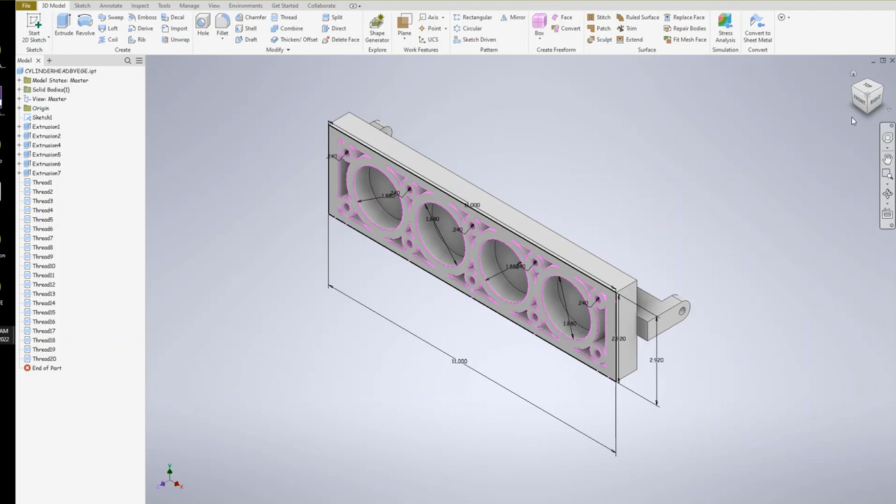Ege, and we're going to continue with the cylinder head project of the V8 motor engine. We are halfway done on the cylinder head, and we're going to simply focus our attention on the input and output valve holes. The valve holes have to be created. There is supposed to be, for each cylinder, one input and one output valve.

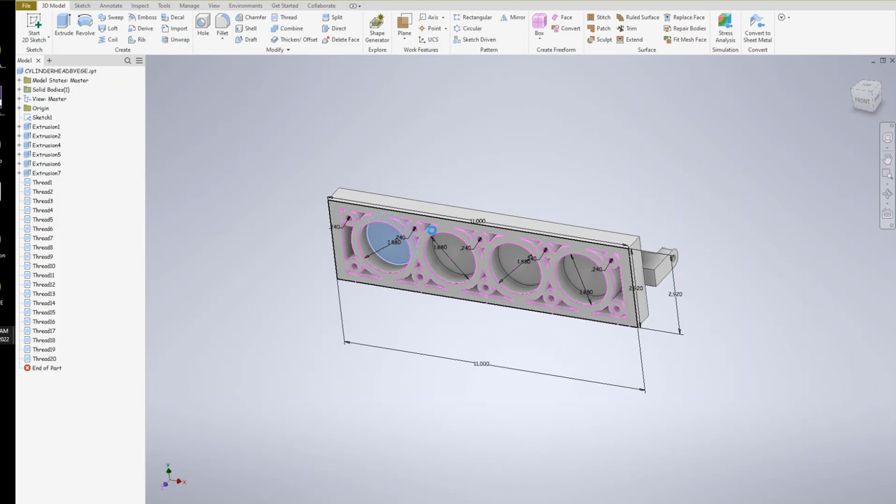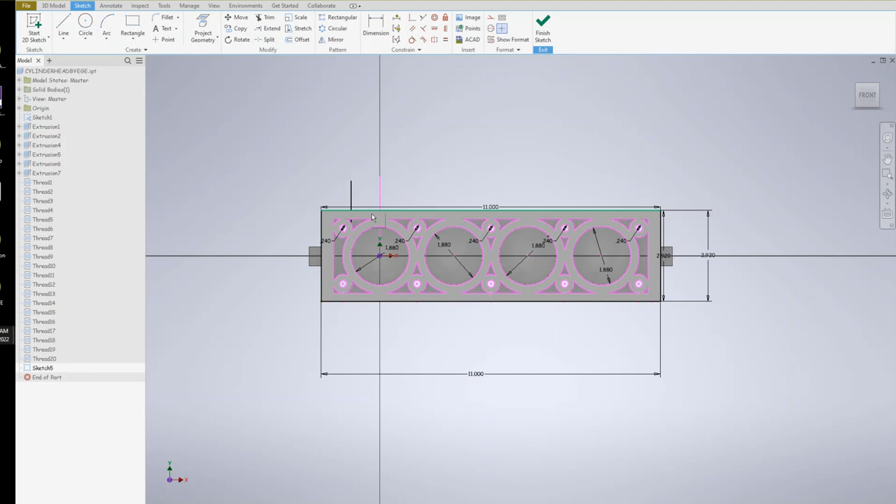For that to happen, we need to select the surface of the cylinder and click and create a sketch. From the dimensions I have, we need to create some construction lines first. I'm going to create one construction line here, enter, and another one right at the quadrant of the circle right here, and these two construction lines are going to help me locate the center of one of the valves.

So I will draw a line from the end of one construction line to the quadrant. Now I want to locate this cylinder right at the center of it. Let me dimension this also from here to 0.94. We're going to draw a line from one end, half of this distance. So half of it is 0.47.

If you don't want to compute from the top of your head, you can write the calculation here. I'm going to backspace this to demonstrate: 0.94 divided by 2, and that will give you the same distance. So that locates the center of the cylinder valve very easily and accurately. So now you start a circle from the midpoint.

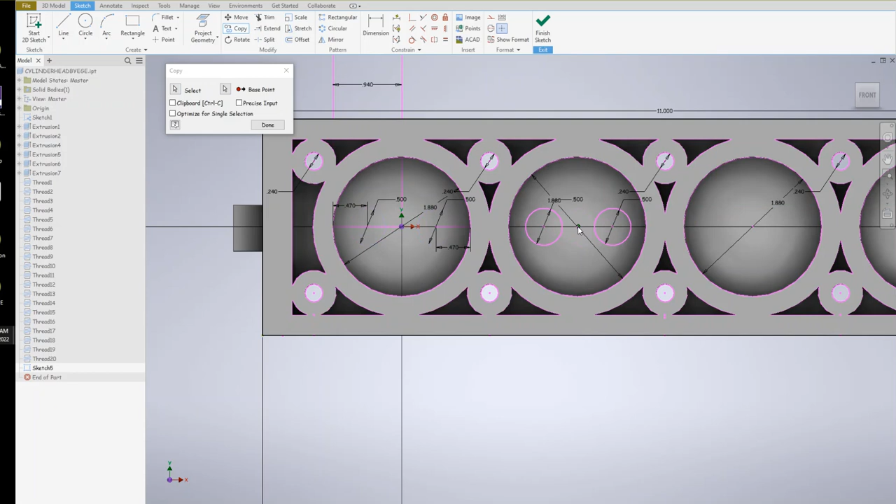So let's use the copy command again, and select the two circles and select the base point. Now your base point is the center of the cylinder, and you're going to simply click at the center of each cylinder, like that. And we are done here. Now the air gas mixture input and the exhaust output hole locations are established, and this is good news. Now we're going to extrude this.

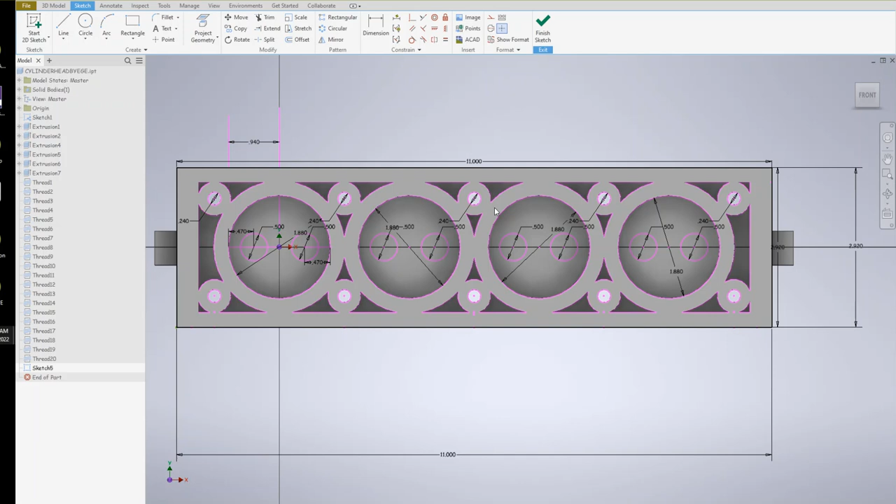Extrusion is a critical process because there is a 90-degree turn. It's not a direct extrusion. It's not a straightforward subtract extrusion only; it's a 90-degree turn around an axis, so you need that axis handy. I'm going to change the angle of viewpoint just to take a look at it. See this line over here at the corner. That corner is going to be the rotational center of the 90-degree extrusion.

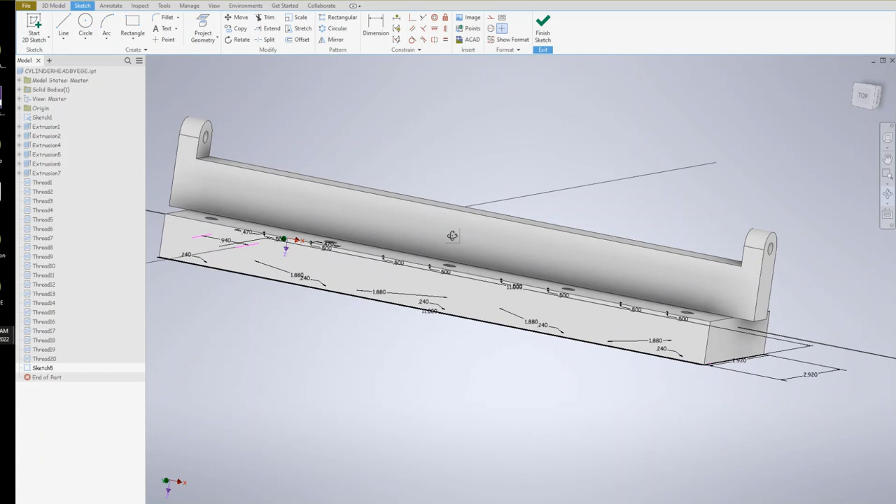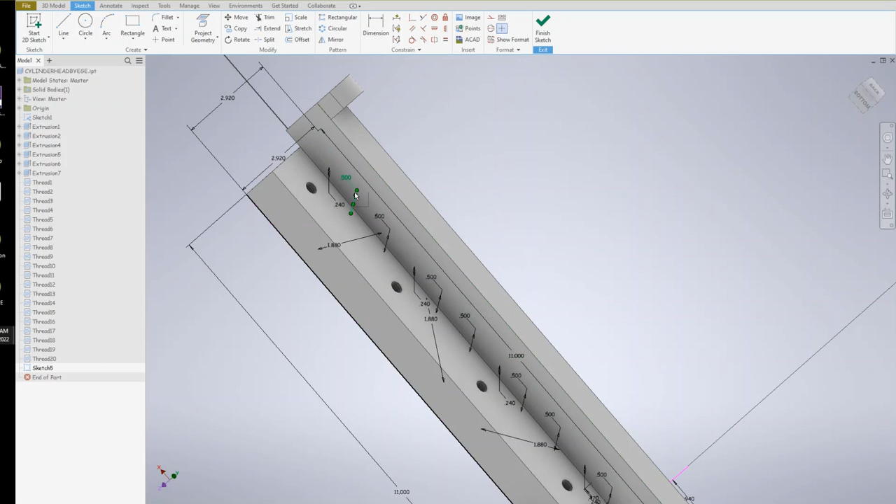So to do that, I'm going to position it. Now, when it is extruded, you want to find the extruded holes of the input gas air mixture on one side and the exhaust holes on the other side. So this surface will actually be providing you the exit holes.

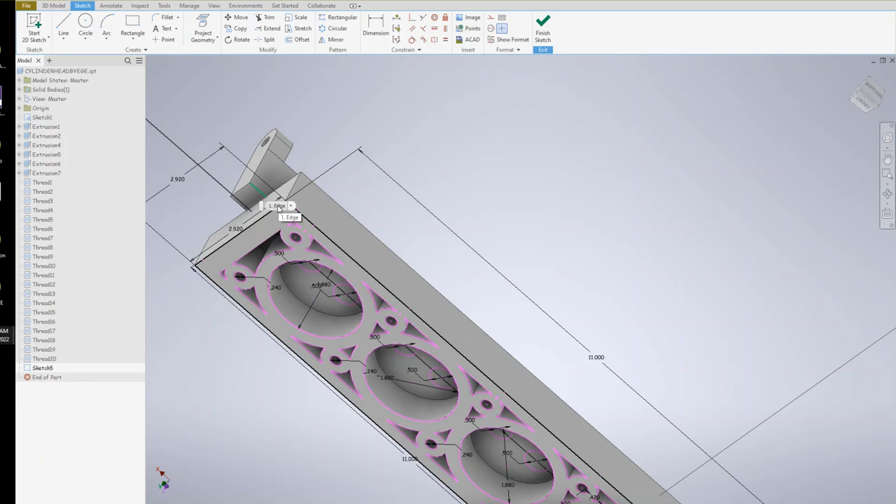So I'm going to simply rotate this. Very good. I wonder if I can rotate a little bit better. There it is. The reason this angle is important is that I want to catch this line over here for the rotation. The computer needs to select the rotational center. All right, so I will turn it a little bit more. Good.

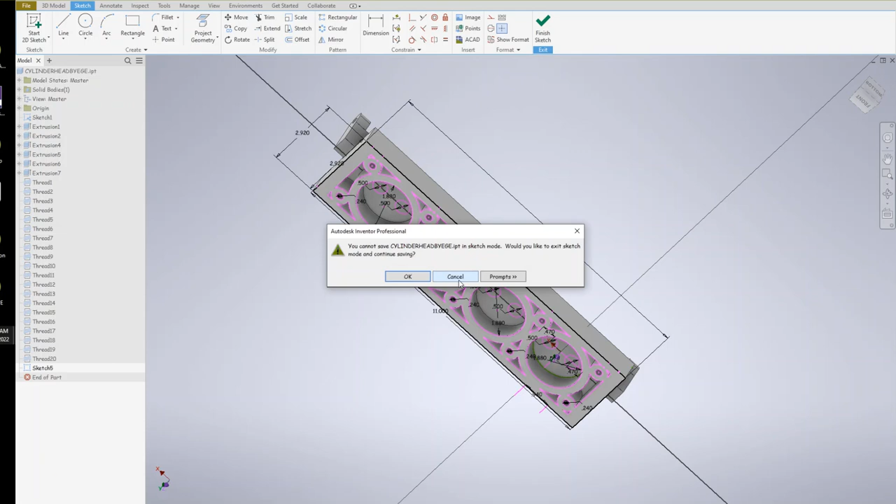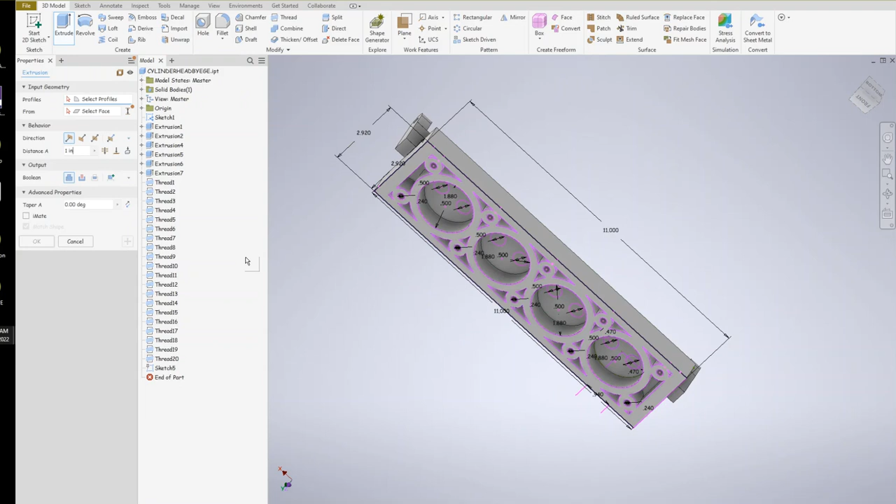And save my work first. I'm going out of the sketch right now, finish the sketch, and click on save. And we're going to go to the extrude command. From this point on, we're going to extrude the input valve holes and the exhaust holes 0.2 inches. We're going to set the extrude and change the amount of extrude to 0.2.

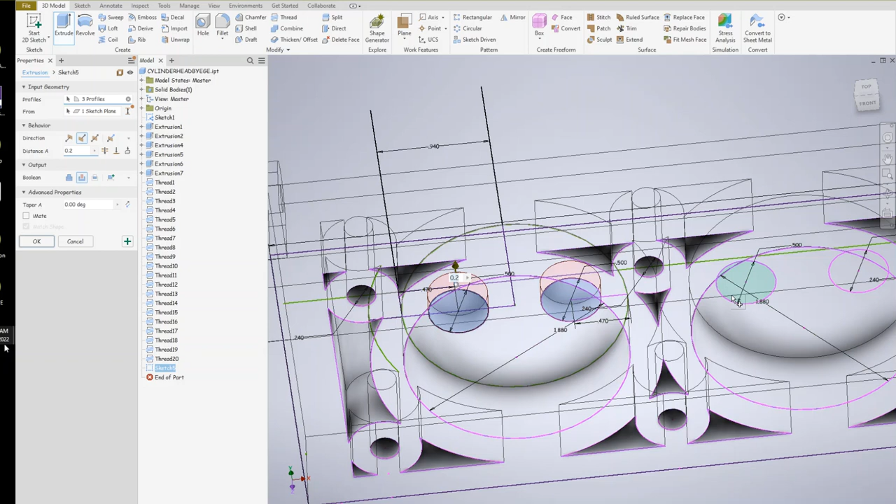And we're going to select the input first, and the exhaust hole. Up extrusion. Be careful when you're selecting. All right, so the extrusions are done. Now it's going to be revolve.

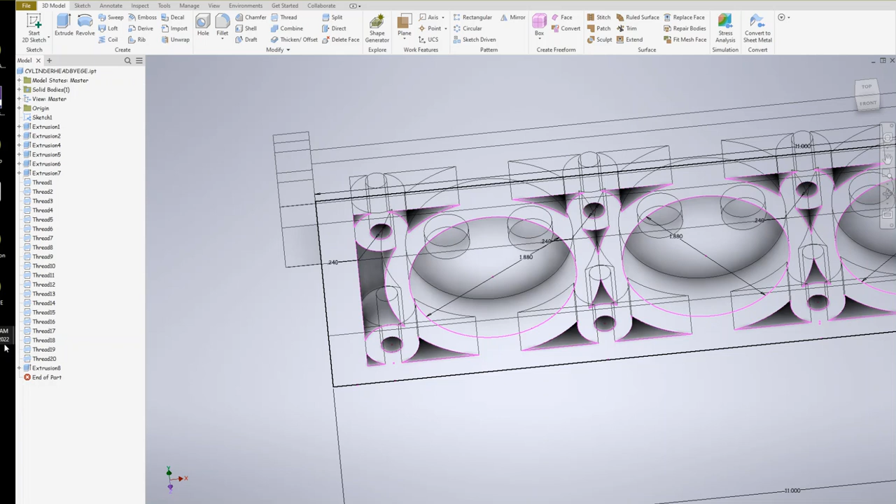So for the revolution, I'm creating a sketch inside the extrusion surface. I clicked on it, pressed the right mouse button and created a sketch on the plane of the inside of the extrusion. So now I'm going to draw a line, a straight line, from around here.

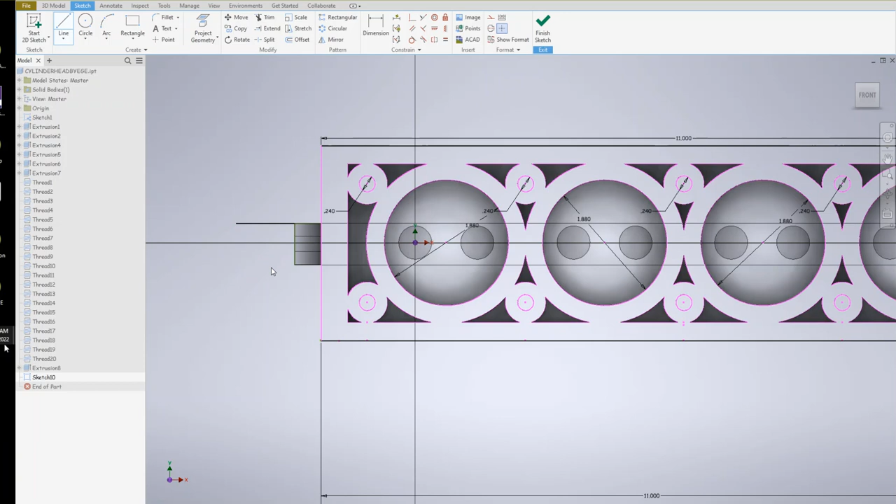Oops, I'm going to erase this. Okay, on the same plane. Why am I drawing this line? Because this line is going to be the revolution axis. All right, so now we're ready to finish the sketch and revolve.

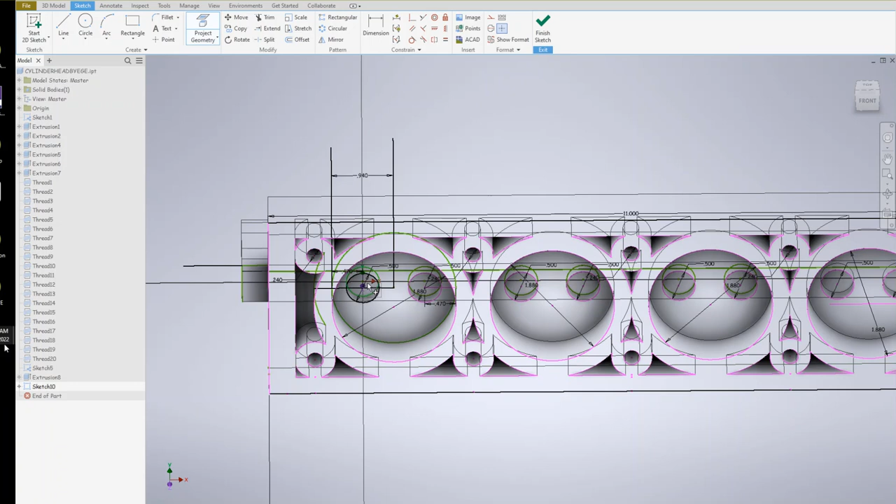Oh, we need to put the circles also. So you go back to sketch, and each circle has to be projected. I'm using the project geometry option here. Project geometry keeps you from creating the circles. Basically, you click on project geometry and then select the circles one at a time.

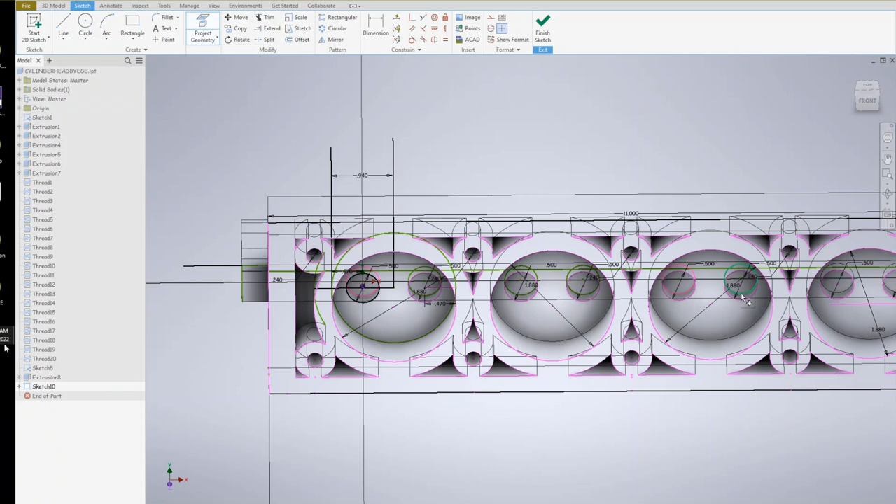And when the circle is highlighted, accept. Make sure that you click when the circle is highlighted. Okay, so finish the geometry and finish the sketch. We are done with the sketch. Now you go to the revolve command. You need to select the 90-degree revolution, and cut, and we need to select each one of the projected geometry.

Click, click, click. Now, input valves go on one side, exhaust valves go on the other side, so that's why I suggest you choose only the input valves first. So I'm just going to redo this to get your attention one more time.

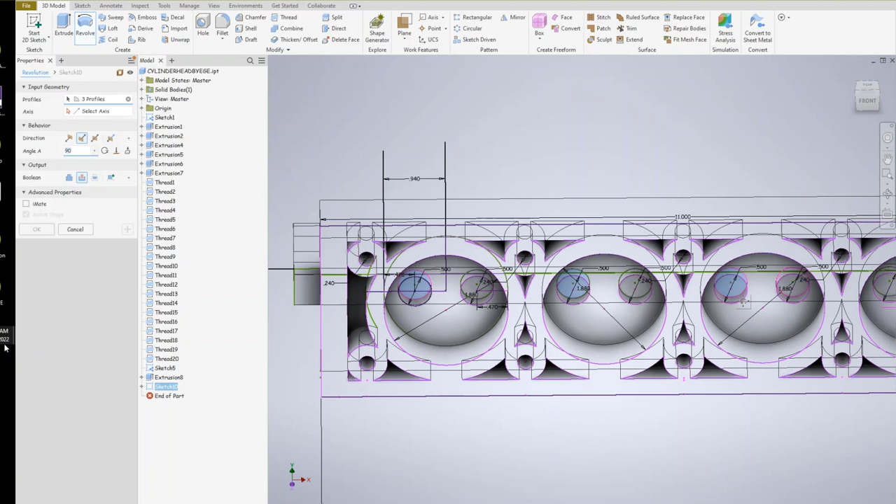Revolve and 90-degree angle, select the profiles. Profiles are already selected, projected as geometry, and now you're moving in, and only input valves are being selected. Now select the axis. The axis has already been chosen. Now take a look at it. It looks perfect to me right now, and okay.

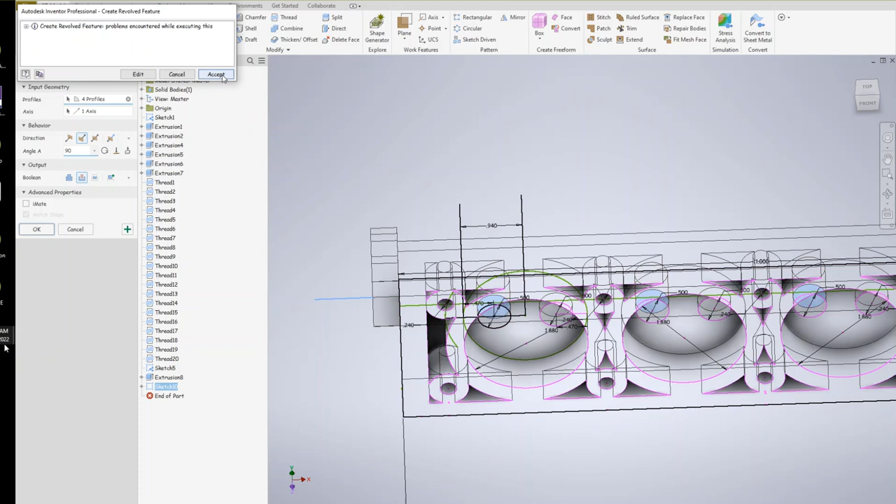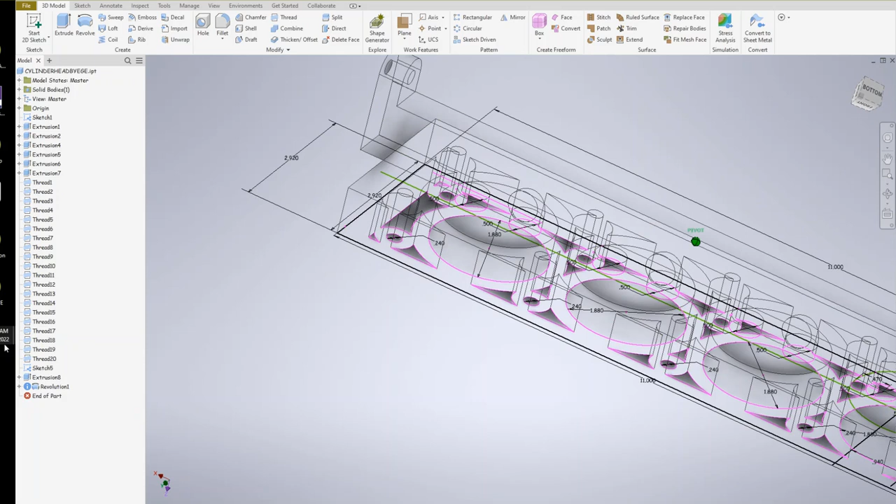So this is one side. This is only done for the input valves. We need to turn to the other side, and the exhaust valves have to be done. So again, we're selecting the surface, creating a sketch, and for the axis we need to create a line from the corner all the way to the other end, enter.

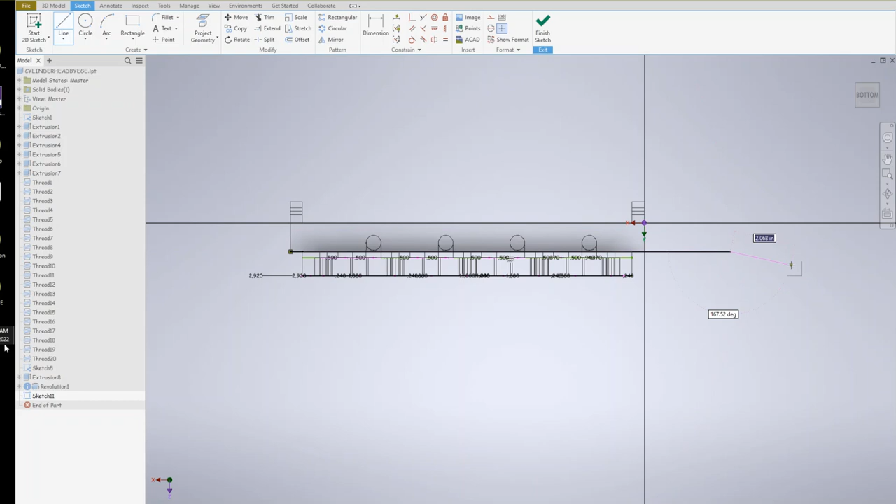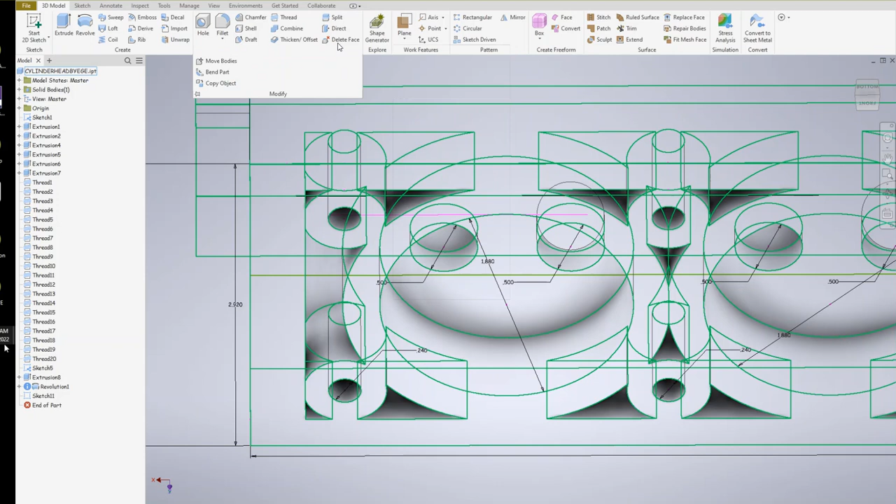Finish the sketch, revolve command, 90-degree angle, and select the profiles. Oh, projection is not done. Let's do the projection. Go to sketch again. Change the angle.

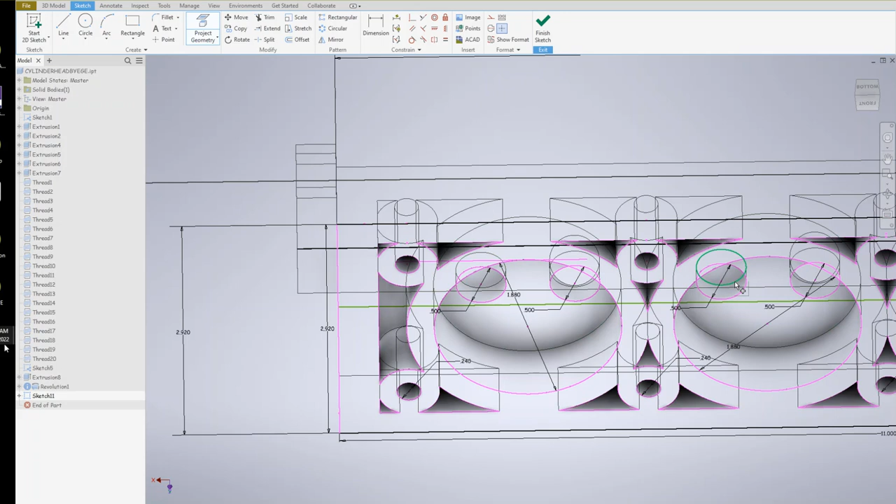Project geometry: inside the sketch, select project geometry, and this time we're selecting the geometry of the extruded exhaust holes. Click on each one of them. When it is highlighted, the computer will show you in green that the extruded holes are projected. Then finish the sketch and go to the revolve command.

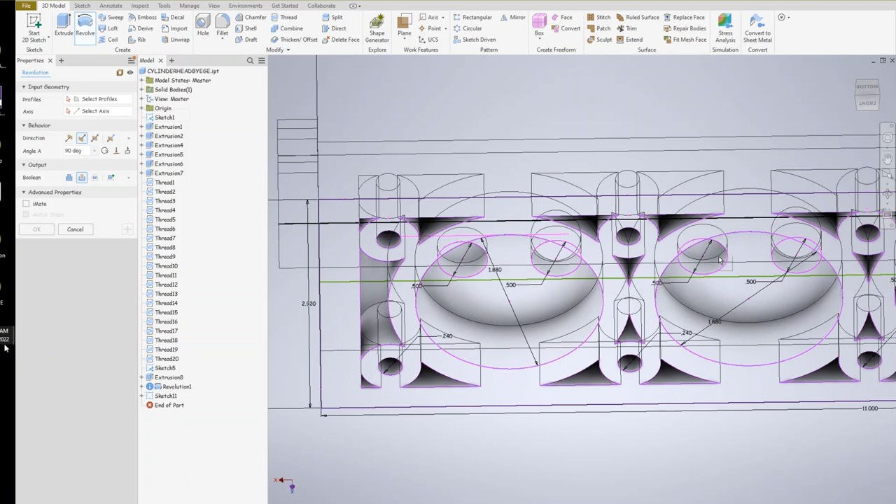Select cut revolve, select 90-degree angle and select the profiles. Click on the profiles. All right, so I'm going to do this part again one more time, so we're able to see it better.

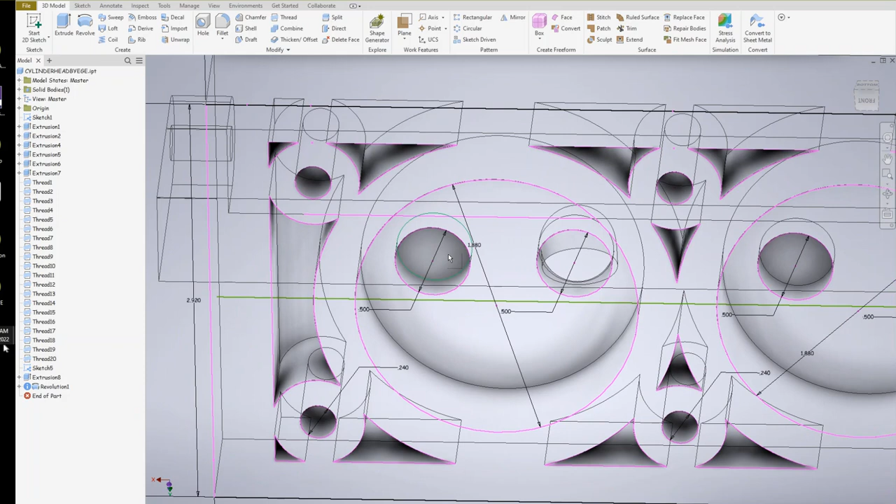First of all, we need to create a sketch at the bottom of the extruded hole. We select this surface and create a sketch, and once the sketch is created, we need to draw a line from the corner, right around here, all the way up to here, and that should be good enough. Enter.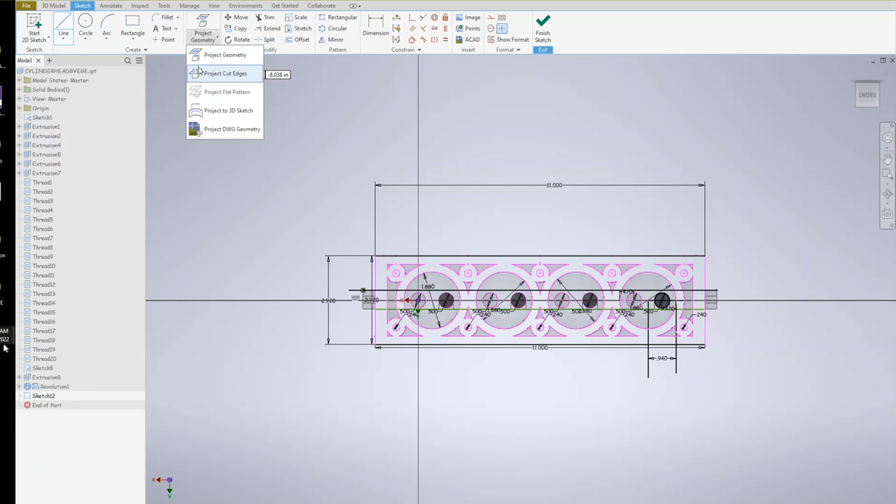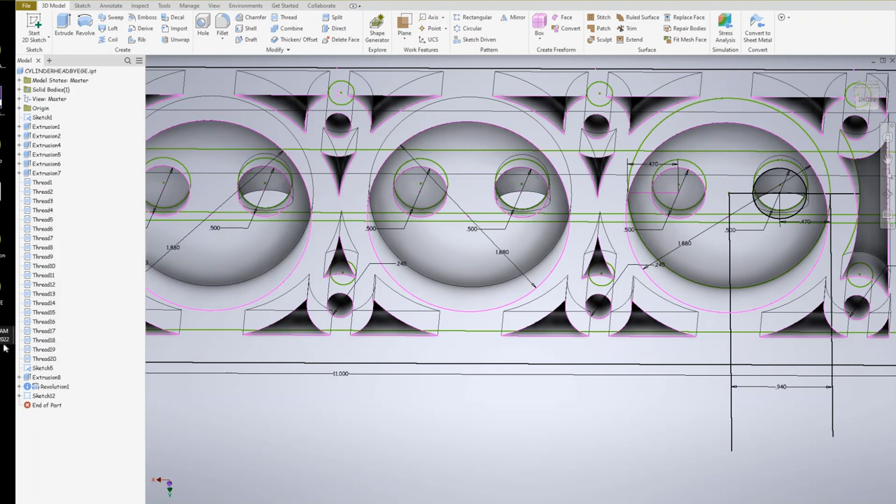Second, we need to project the geometry. That is the circle we're looking for. So click on project geometry and project cut edges. I just want to make sure that, okay. Now we're finishing the sketch. And now we go to the revolve option, cut, 90-degree, select the profiles.

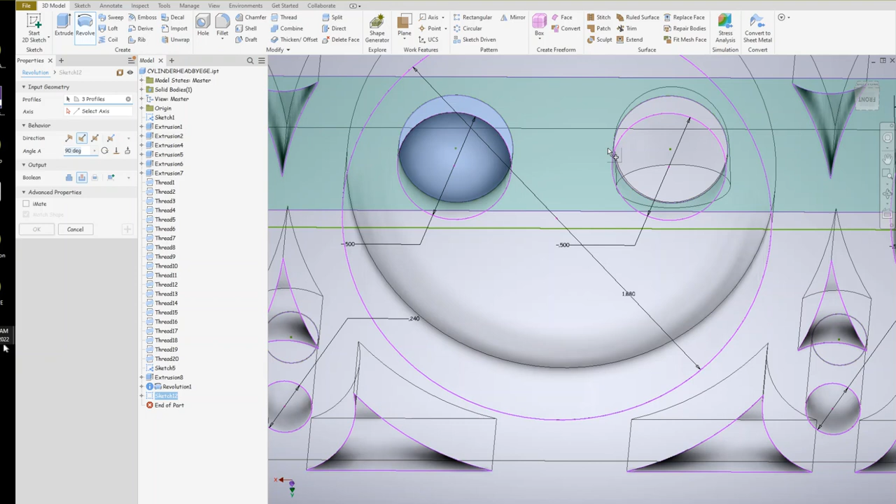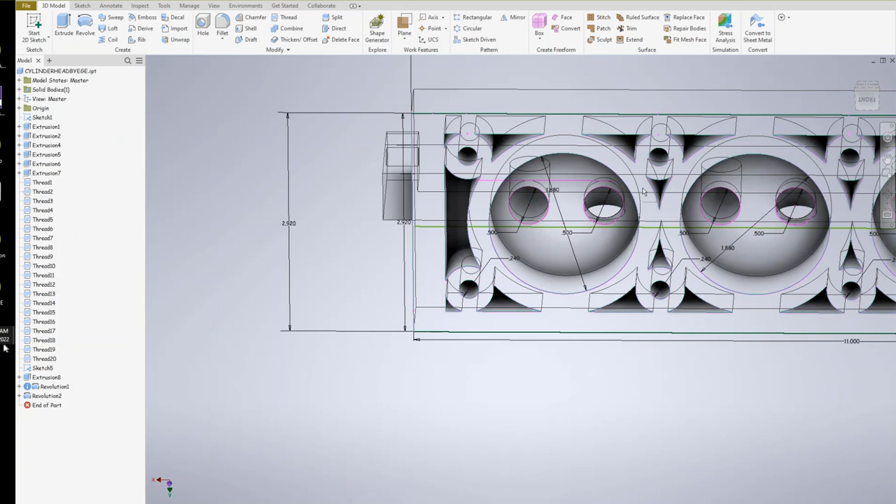And we're going to continue. Now we're going to select the axis. The axis is already selected, and the revolution is made. You can see that, and I'm going to click OK. I'm going to turn it around to see the revolution. The holes are made, and now I can go to views and change the visual style

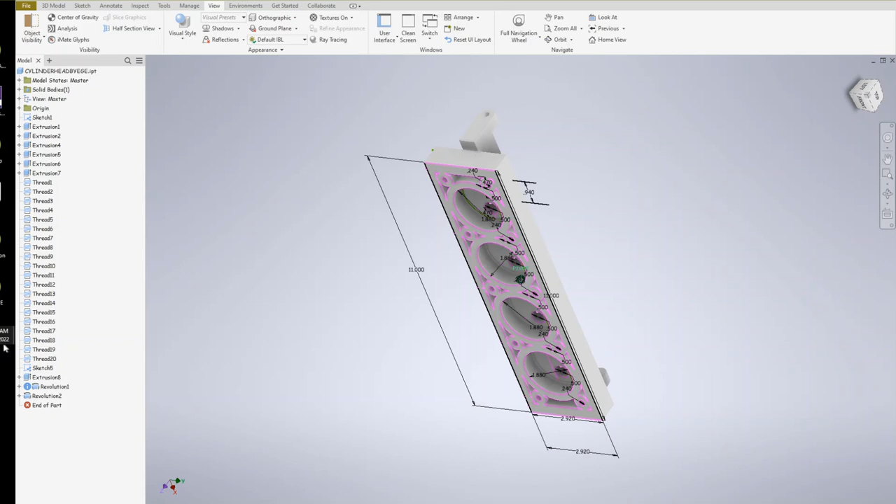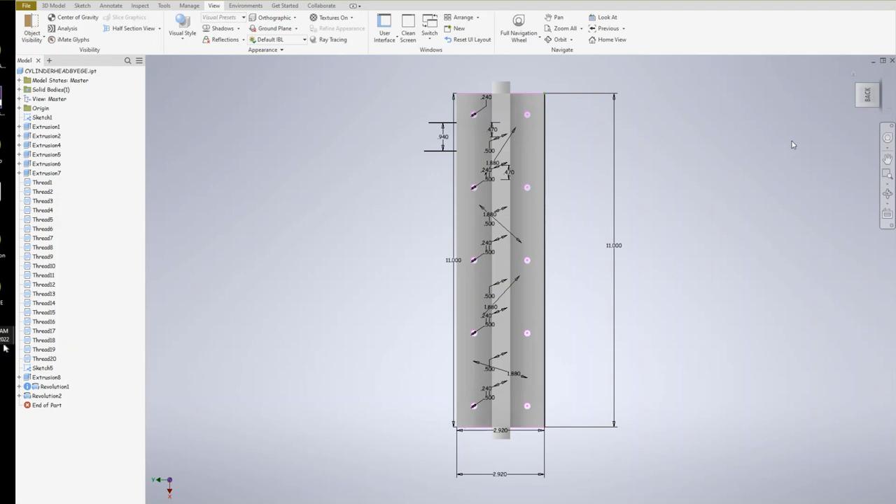to realistic style. So these are your input and exhaust holes on the cylinder head. In addition, each one of those holes needs valve openings, the valve holes on the top. To do that, we're going to extrude a hole on the top. I'm going to select the top surface first, click here, make a sketch, because those holes also have to be drawn exactly.

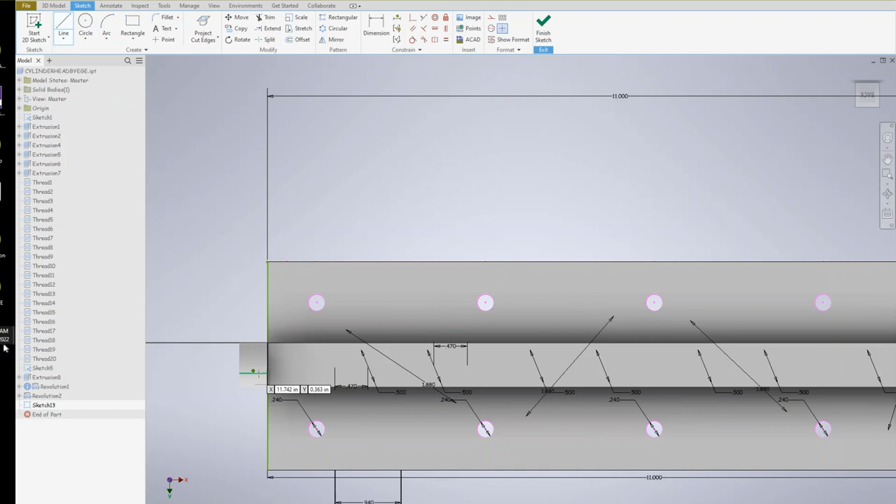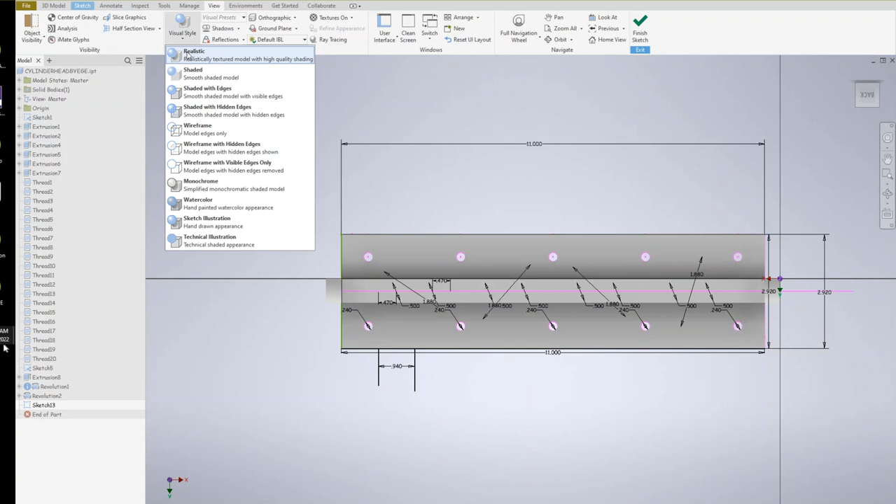We're drawing a construction line from corner to corner, a center line as usual. Center line locations are already shown by Inventor. Now, again, I have to go to view mode and select transparent wireframe mode, even though I'm in the same sketch on the top surface.

Now I need to draw a line to locate the center of the hole. And what is the size of the valve hole to accommodate the input and output valves? That depends on the size of the valve, but I took a note of it before, and it appears to be 0.2 inches. So I'm going to simply draw a circle from the center.

I'm going to check other notes around here in case we have a different size, but 0.2 inches, I'm going to accept that now. And 0.2. Then I will copy each one of them on top of each hole. So we're going to use the copy command, select the circle, and select the from point.

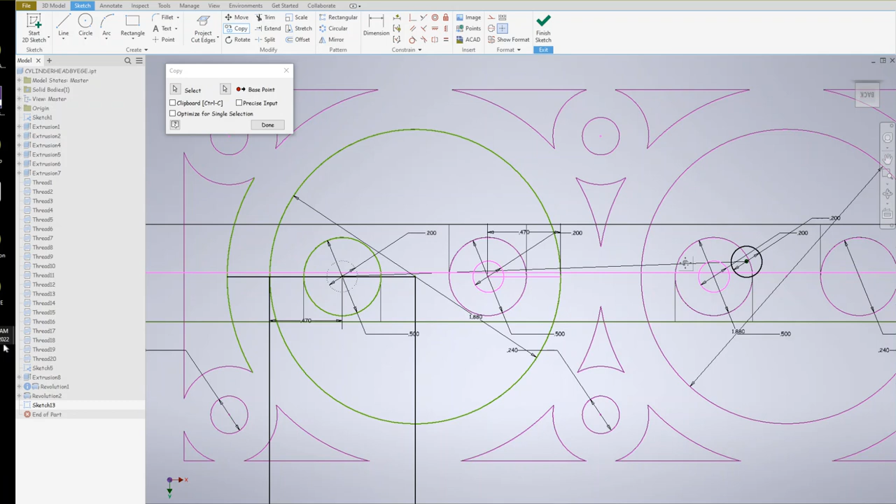And make one copy. These will be extruded all the way through the hole. I think there's a little bit off, I'm going to correct that, and then erase.